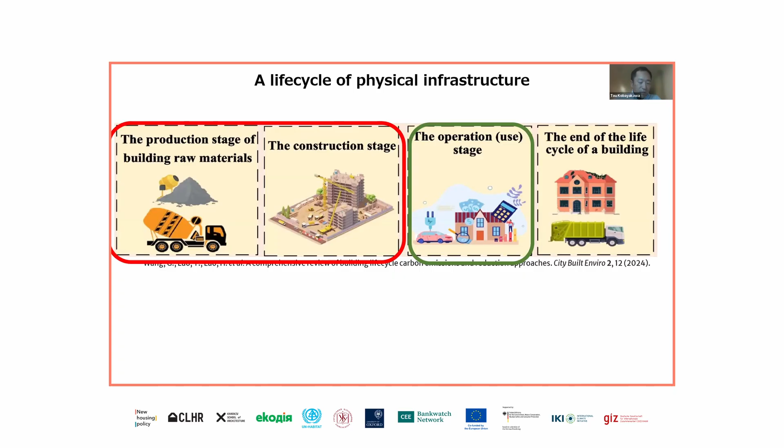While working at JICA on Ukraine's recovery support, I came to believe that we should also focus on minimizing CO2 emissions in this part of the reconstruction process. With that in mind, I conducted research aiming to estimate the carbon footprint associated with the reconstruction of Ukraine and propose feasible measures to reduce it.

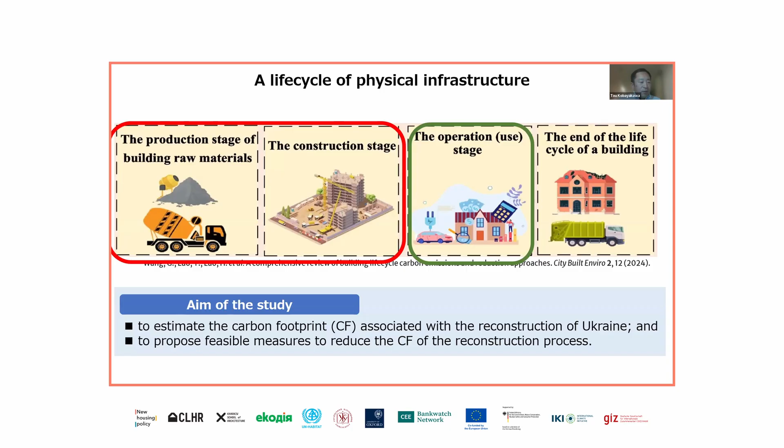I will not go into detail about the research methods today, but using an input-output table, it is possible to estimate CO2 emissions from the reconstruction process, the part highlighted in red on the previous slide. For this analysis, I used the EORA26 database, which includes data for Ukraine.

In addition to estimating emissions, we need information on what types of infrastructure need to be rebuilt and how much this reconstruction would cost. For this purpose, I relied on the results of the Rapid Damage and Needs Assessment, RDNA, conducted by the World Bank, the United Nations, the government of Ukraine, and the European Union.

The RDNA has been conducted four times so far. Because Russia's attacks are still ongoing, the estimated cost of recovery has continued to increase with each assessment. In my study, I used data from RDNA3, so if the newer RDNA4 data were applied, the estimated CO2 emissions from reconstruction would be even higher.

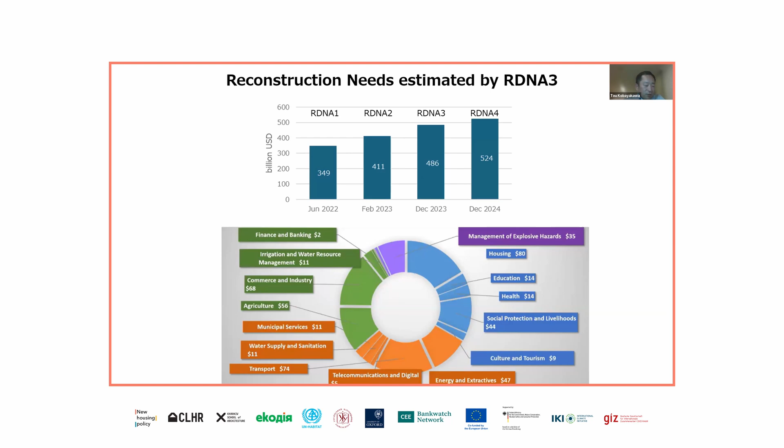As a result, it was found that the reconstruction process in Ukraine would generate approximately 741 million tons of CO2. Notably, the construction sector alone accounts for about 77% of the total emissions, highlighting the importance of improving its efficiency. According to several studies, Ukraine's construction sector faces challenges such as low labor productivity and frequent rework due to inadequate design, which need to be addressed to reduce emissions.

This estimated 741 million tons of CO2 emissions is equivalent to about 4 years worth of Ukraine's total annual territorial emissions before the war. It also corresponds to around 26% of the total territorial CO2 emissions of all EU 27 countries in 2022, indicating that this is quite a large amount of emissions.

Based on these results, I believe two key approaches are necessary for Ukraine's reconstruction process. First, there is a need to modernize Ukraine's construction sector. By introducing digital technologies such as building information modeling, BIM, it would be possible to improve precision and efficiency of design and construction.

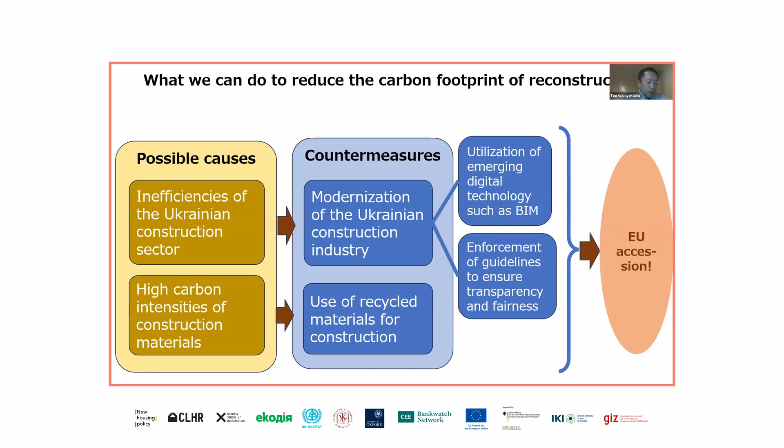Advancing these efforts would also support Ukraine's path toward EU accession as they align with the EU's decarbonization agenda. If Ukraine develops a recycling industry for construction materials, it would benefit both sides, helping the EU promote low carbon materials while giving Ukraine a strategic advantage as it moves toward EU membership.

As a result of these efforts, if the carbon intensity of Ukraine's construction sector could be reduced to a level comparable to that of Germany's construction industry, the carbon footprint of the reconstruction process could be cut by more than half, from 741 million tons to around 334 million tons. Although Germany's construction sector still has a relatively high carbon intensity compared to other EU countries, it could serve as a realistic and meaningful benchmark for Ukraine as it moves towards EU membership.

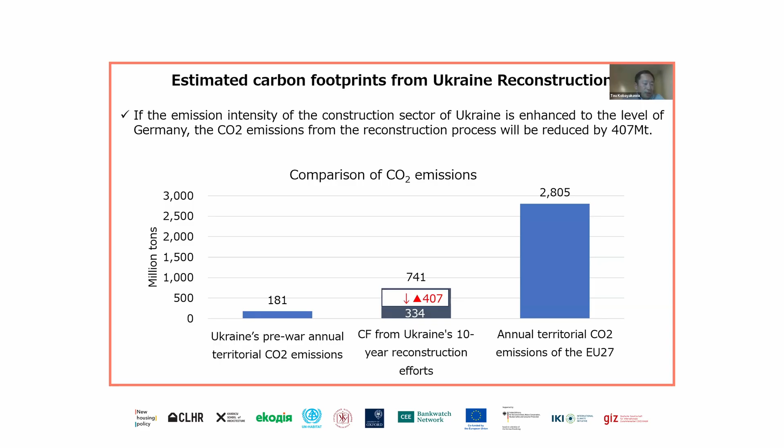Japan also has experience in managing and reusing debris. The photo shows a scene from the reconstruction process after the Great East Japan earthquake, where local governments employed residents to carry out meticulous waste separation. In Higashi Matsushima City, for example, a 99% recycling rate was reportedly achieved. Such cases highlight that community engagement plays a crucial role in advancing these kinds of initiatives.

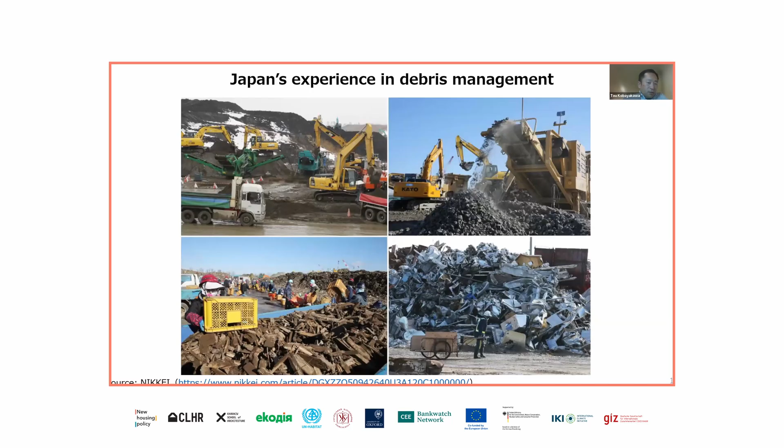International development agencies such as UNDP and JICA have already started pilot projects in Ukraine to test debris management and recycling possibilities. The photo shows one such pilot project in Borodianka, Kiev Oblast, where heavy machinery provided as aid is being used to process debris. Since some of the debris contains asbestos, strict safety measures are being observed. The lessons learned from this project are also being shared with several other municipalities, including Kharkiv.

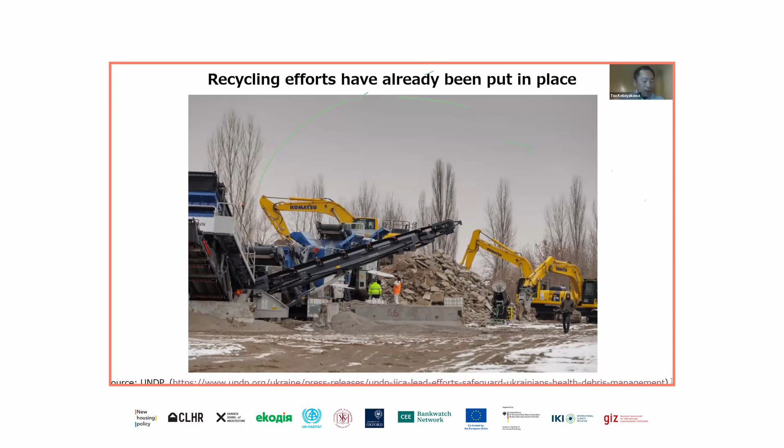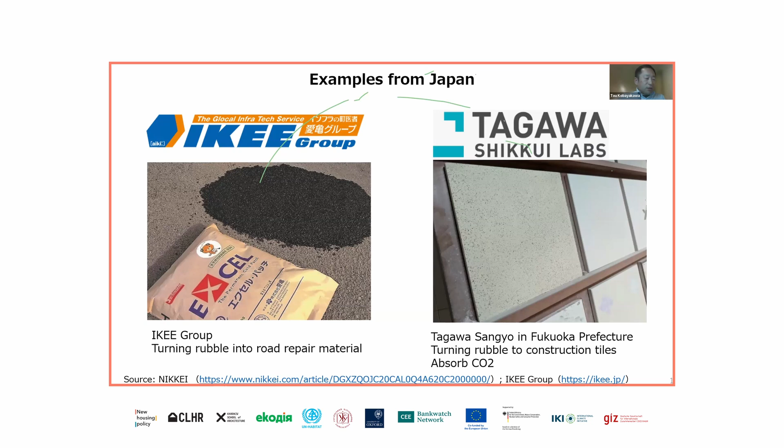Finally, let me introduce a couple of Japanese companies that are producing building materials made from recycled debris. A company called IKEE sells materials that can be used to manufacture road repair products from debris. Another company, Tagawa Sangyo, has developed a technology to produce tiles, construction materials, from debris, and remarkably, these tiles can absorb CO2. Both companies are eager to contribute to Ukraine's reconstruction and are currently considering expanding their business to Ukraine with support from the government of Japan.

Lastly, I would like to express my sincere hope that Ukraine will achieve a green recovery through a Building Back Better approach and move towards a bright and prosperous future. So thank you so much.